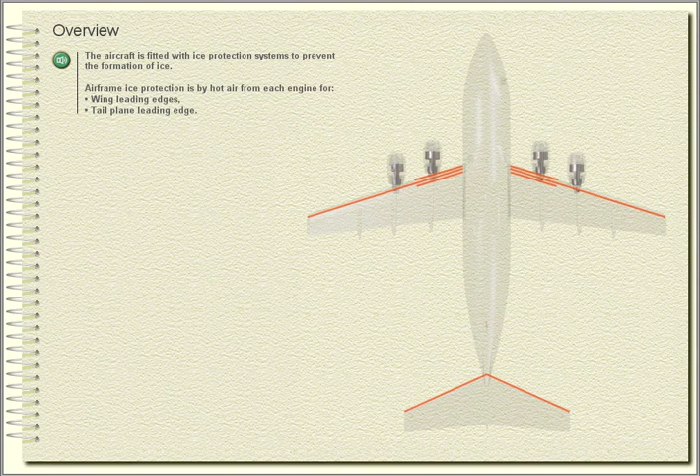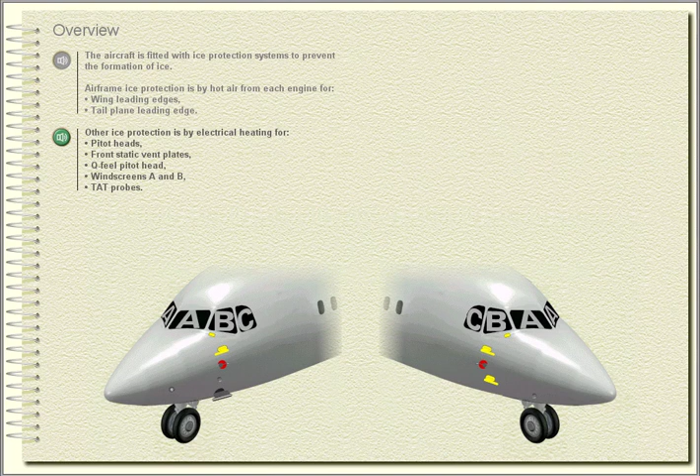Other ice protection is by electrical heating for pitot heads, front static vent plates, Q-Feel pitot head, windscreens A and B, and TAT probes. Each A windscreen is provided with a 2-speed wiper and a manually operated screen wash. An ice detector is fitted to warn the crew of ice accretion.

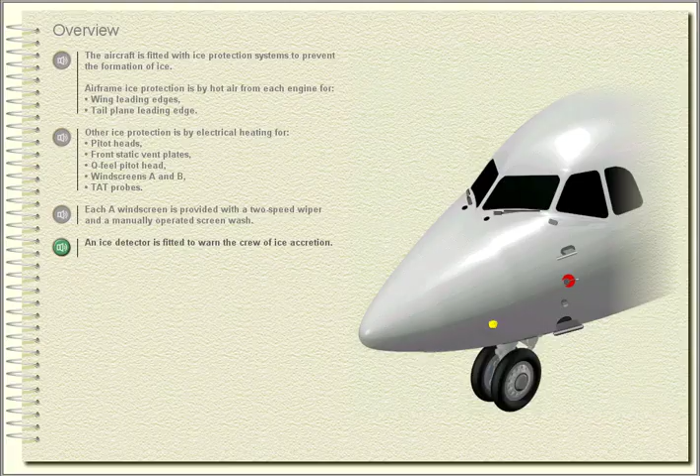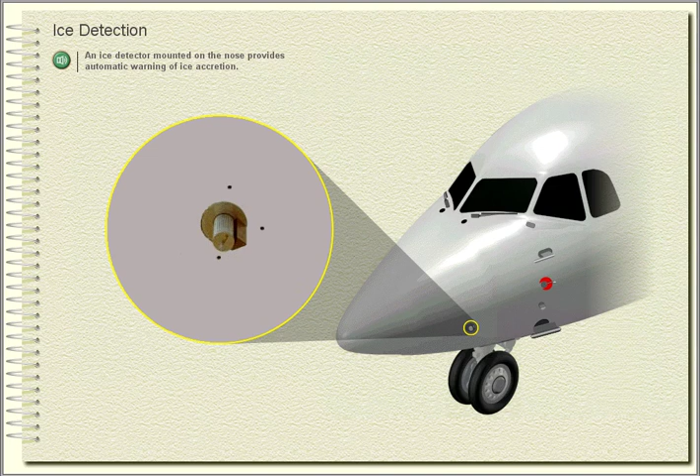Ice detection. An ice detector mounted on the nose provides automatic warning of ice accretion. The ice detector is controlled by the ICE DETECT switch on the ice protection panel. The switch is normally on and is covered to prevent it being selected off accidentally.

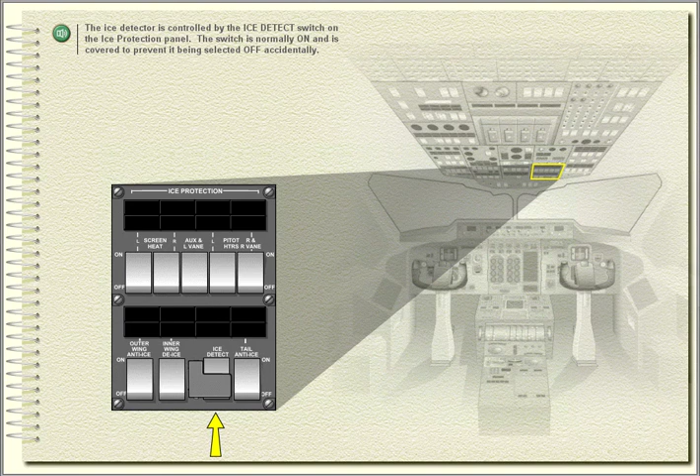The ice detector comprises an AC motor driving a serrated rotor next to a fixed knife-edge cutter. In icing conditions, the cutter shaves the ice which forms on the serrated rotor.

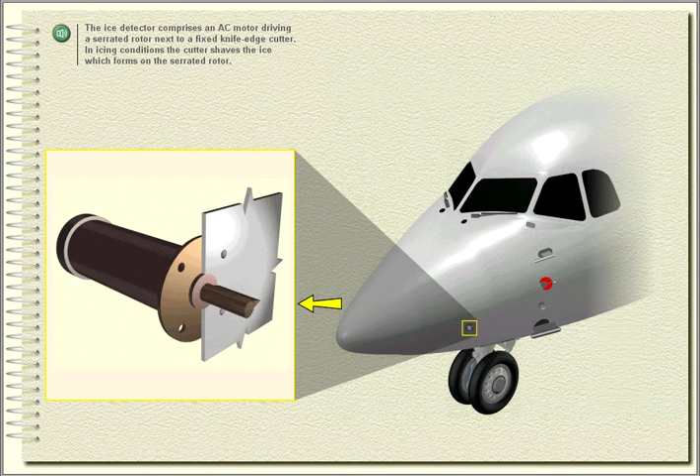This action produces a torque reaction in the motor, which illuminates ice detected on the central warning panel. The annunciator will remain lit for 60 seconds or until the aircraft is out of icing conditions.

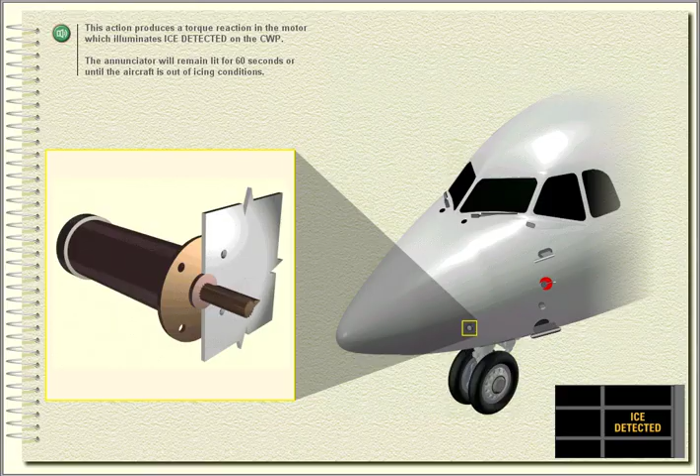Wing ice protection. Wing ice protection is provided by two separate systems: outer wing anti-icing and inner wing de-icing. The complete wing leading edge is anti-iced by hot air, normally supplied from the outer engines 1 and 4.

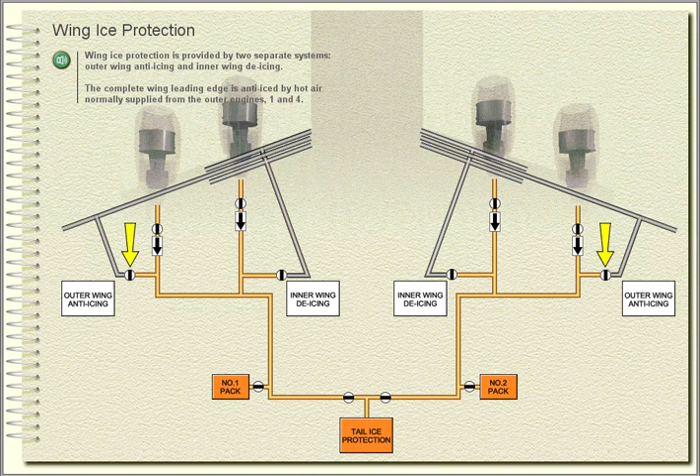Additional ice protection is provided for the inner section of the wing only, which is de-iced by hot air, normally supplied from the inner engines 2 and 3.

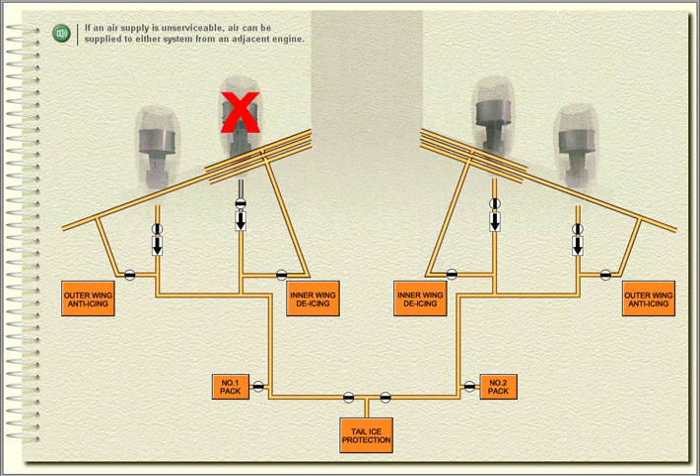If an air supply is unserviceable, air can be supplied to either system from an adjacent engine. Exhaust air is ducted overboard through under-wing vents or at the wingtips across the aileron horn.

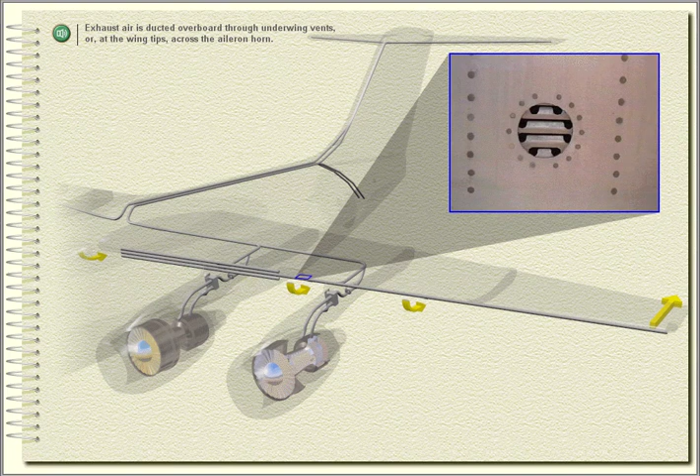Outer wing anti-icing is used whenever ice forms on the airframe to keep the leading edge clear of ice. Inner wing de-icing is used during holding and approach in icing conditions to remove built-up ice from the inner section of the wing.

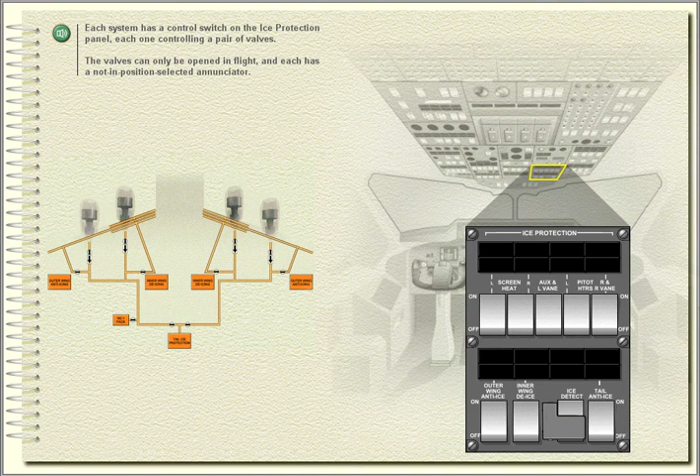Each system has a control switch on the ice protection panel, each one controlling a pair of valves. The valves can only be opened in flight, and each has a not in position selected annunciator. Operation of either outer wing anti-icing or inner wing de-icing is confirmed by wing tail anti-ice on.

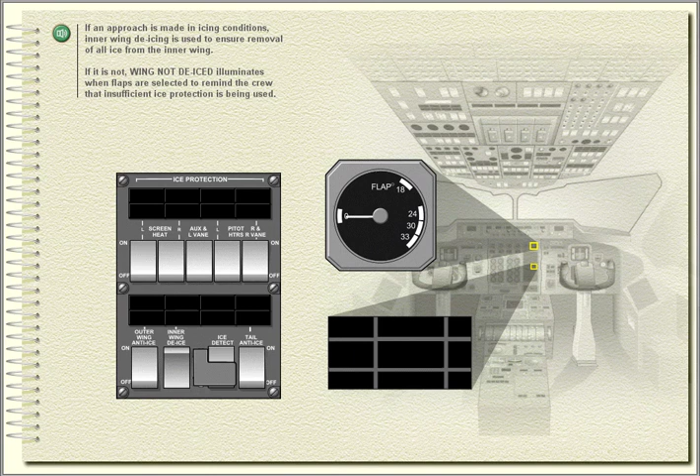If an approach is made in icing conditions, inner wing de-icing is used to ensure removal of all ice from the inner wing. If it is not, wing not de-iced illuminates when flaps are selected to remind the crew that insufficient ice protection is being used.

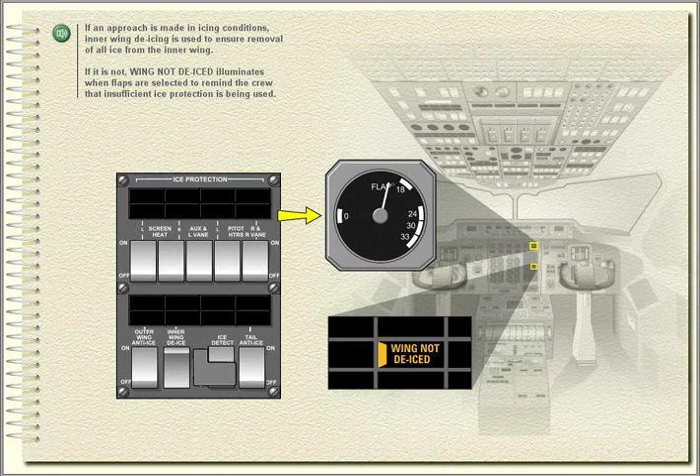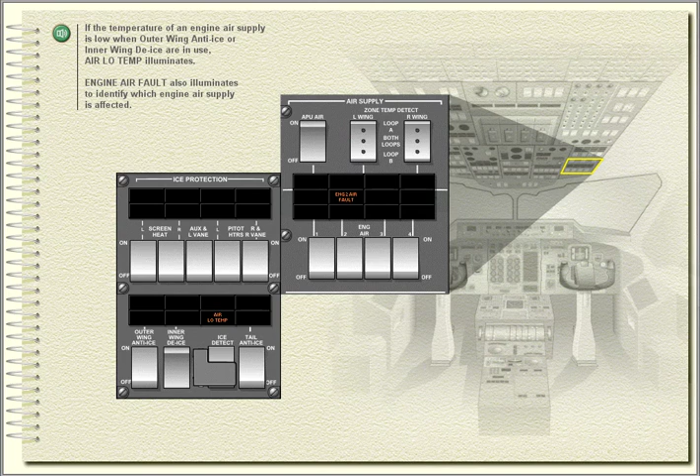If the temperature of an engine air supply is low when outer wing anti-ice or inner wing de-ice are in use, air low temp illuminates. Engine air fault also illuminates to identify which engine air supply is affected. Engine air fault will not illuminate if the engine air valve is selected off.

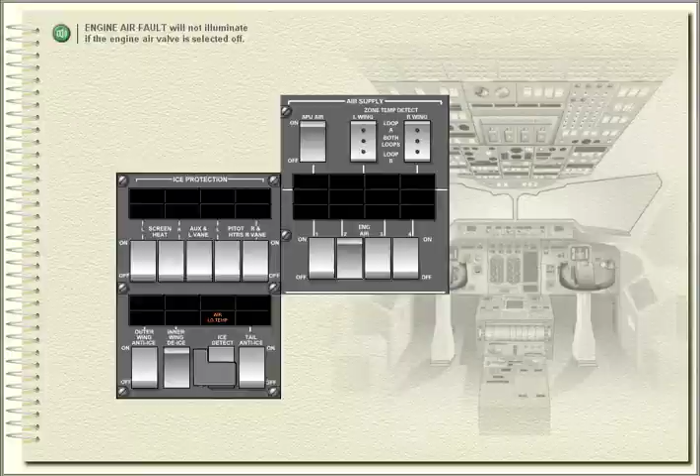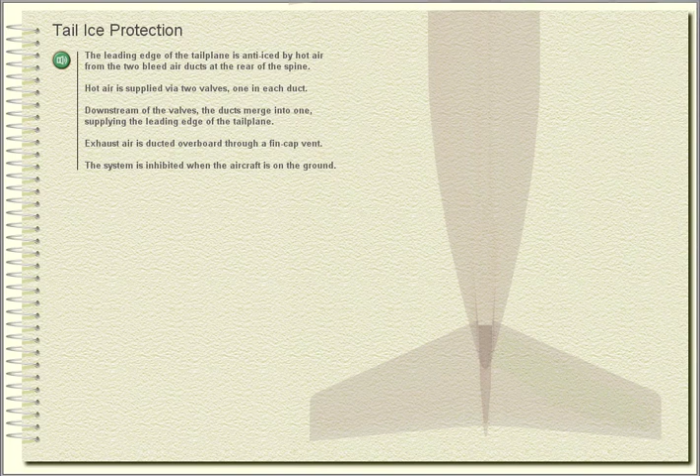Tail ice protection. The leading edge of the tailplane is anti-iced by hot air from the two bleed air ducts at the rear of the spine. Hot air is supplied via two valves, one in each duct.

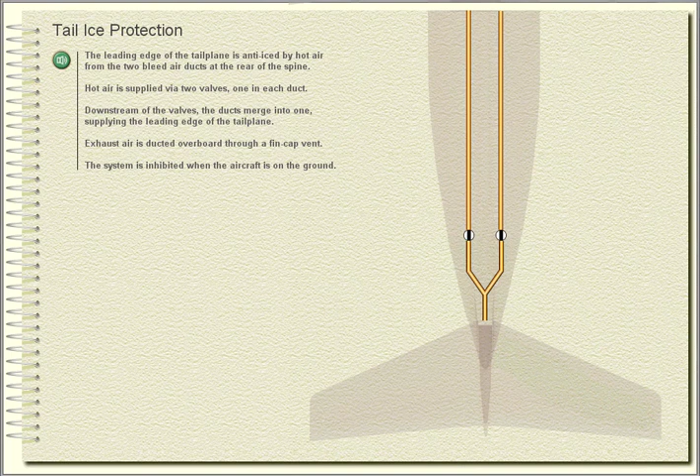Downstream of the valves, the ducts merge into one, supplying the leading edge of the tailplane. Exhaust air is ducted overboard through a fin cap vent. The system is inhibited when the aircraft is on the ground.

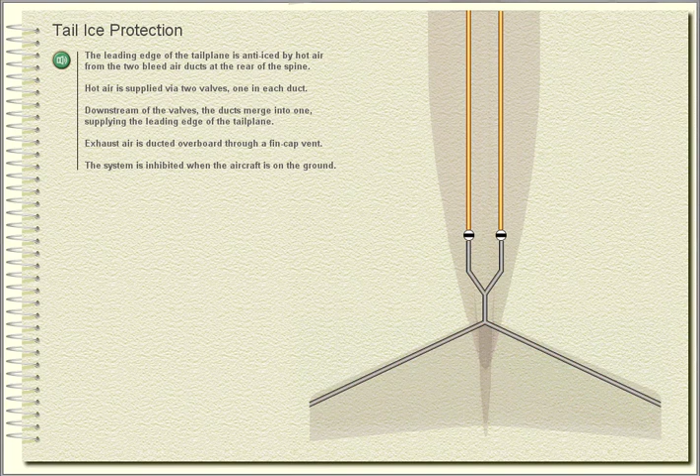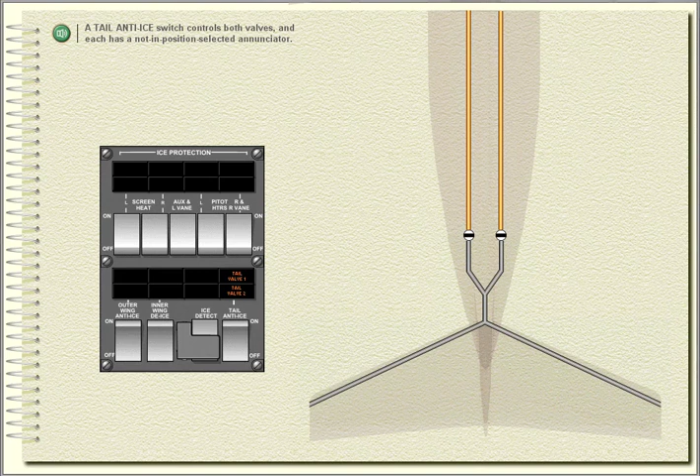A tail anti-ice switch controls both valves, and each has a not in position selected annunciator. Operation of tail anti-icing is confirmed by wing tail anti-ice on. This annunciator confirms the operation of any of the three airframe ice protection systems.

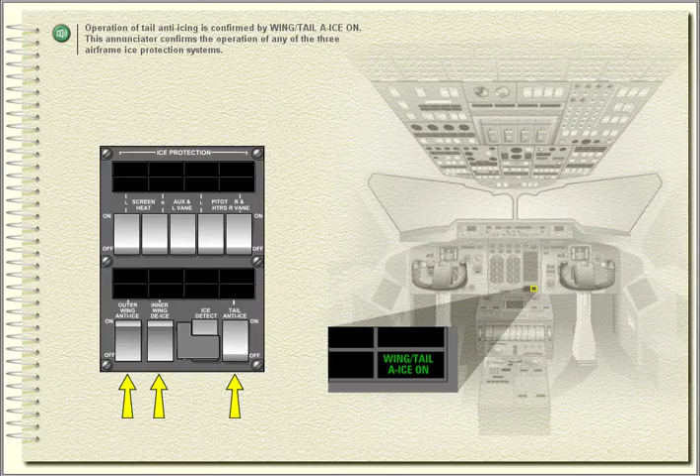Pitot and static heaters. The pitot heads, static plates, TAT probes and airflow sensor vanes are fitted with electrically heated elements to prevent ice formation.

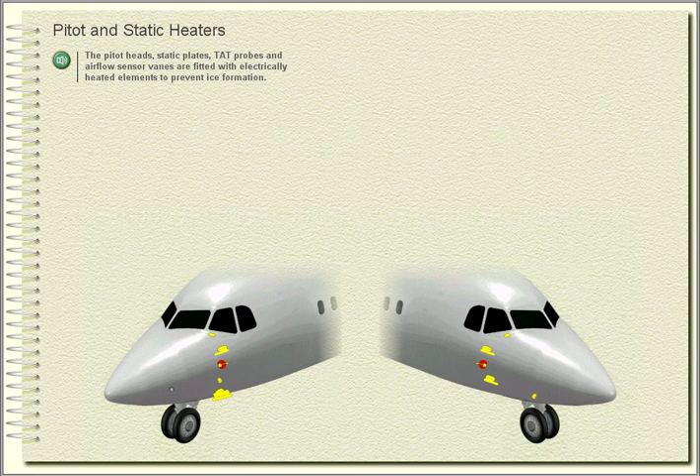There are three pitot heads mounted on the forward fuselage. The captain's on the left-hand side, the first officer's on the right-hand side. An auxiliary pitot head is fitted on the right-hand side just below the first officer's. A Q-pot pitot static head supplies the control feel system and is mounted on the underside of the forward fuselage.

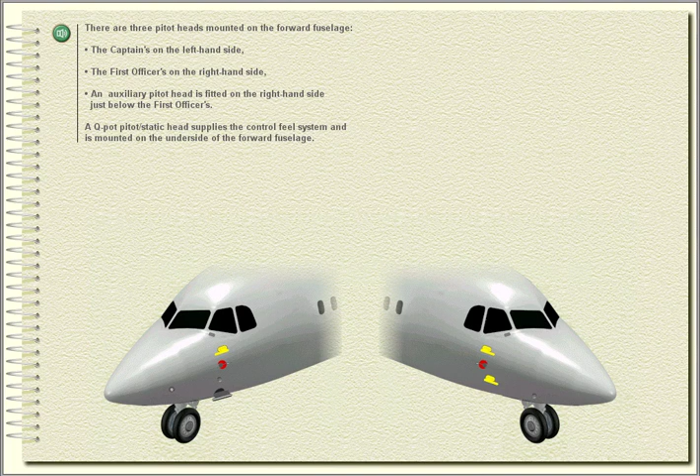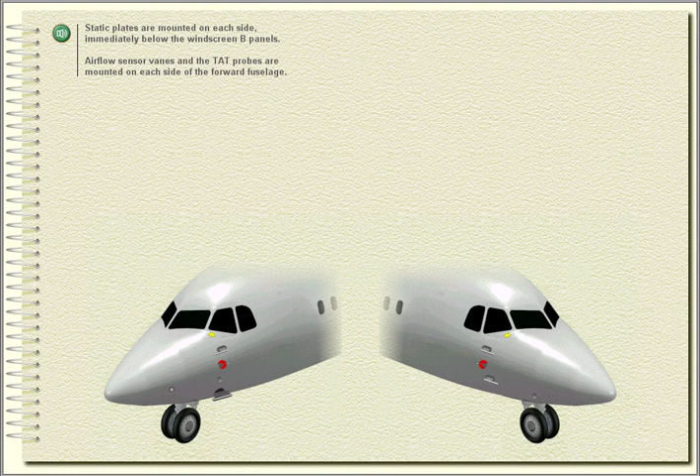Static plates are mounted on each side, immediately below the windscreen B panels. Airflow sensor vanes and the TAT probes are mounted on each side of the forward fuselage.

Three switches, labelled left pitot heaters, right pitot heaters and right vane, and auxiliary and left vane, control power to the pitot heaters and airflow sensor vane heaters.

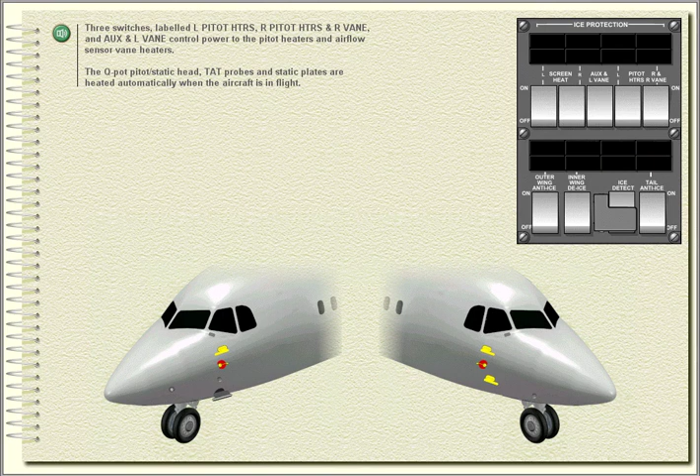The Q-pot pitot static head, TAT probes and static plates are heated automatically when the aircraft is in flight. Failure of any pitot heater, airflow sensor vane heater or the Q-pot pitot static heater is indicated on the ice protection panel. There is no failure indication for a static plate or TAT probe heater.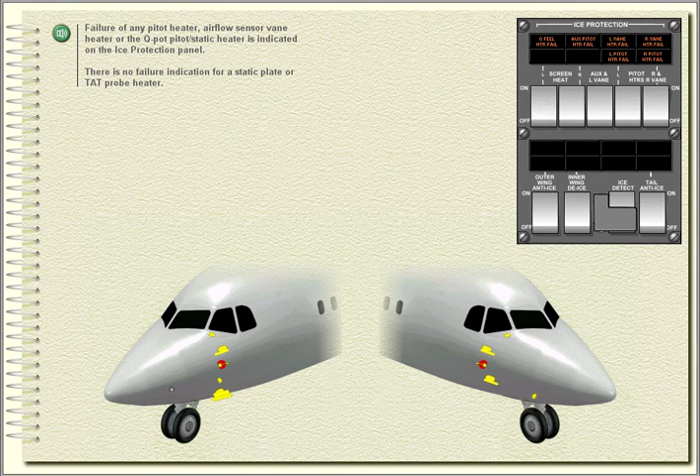Windscreen heating. The A and B windscreen panels are electrically heated to prevent the formation of ice and mist on them, and to improve their resistance to bird strike.

Heating for the left and right A and B panels is controlled from the left and right screen heat switches on the overhead panel.

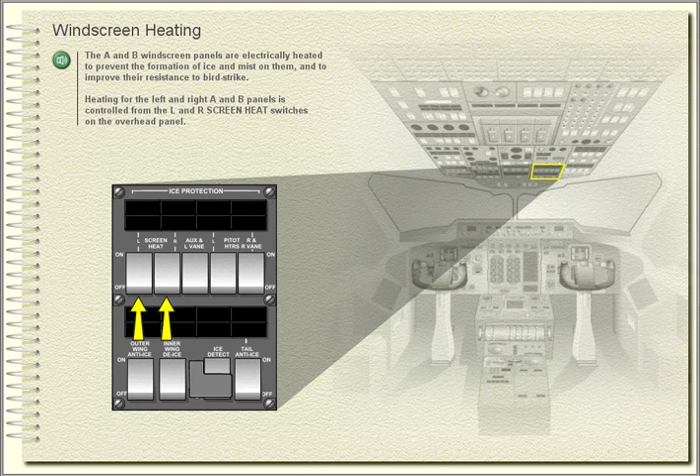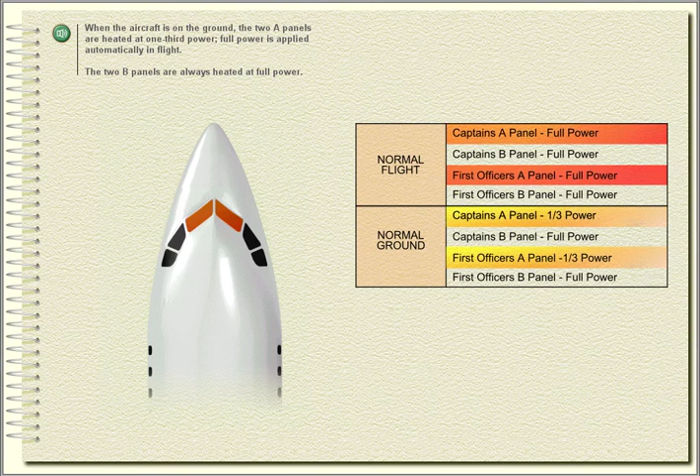When the aircraft is on the ground, the two A panels are heated at 1/3 power. Full power is applied automatically in flight. The two B panels are always heated at full power.

When electrical power is reduced to the essential level, the captain's A panel is heated at 1/3 power. The captain's B panel and both of the first officer's panels are not heated.

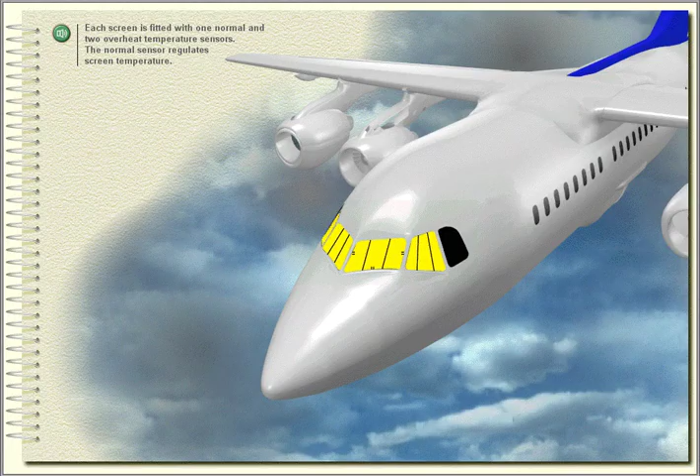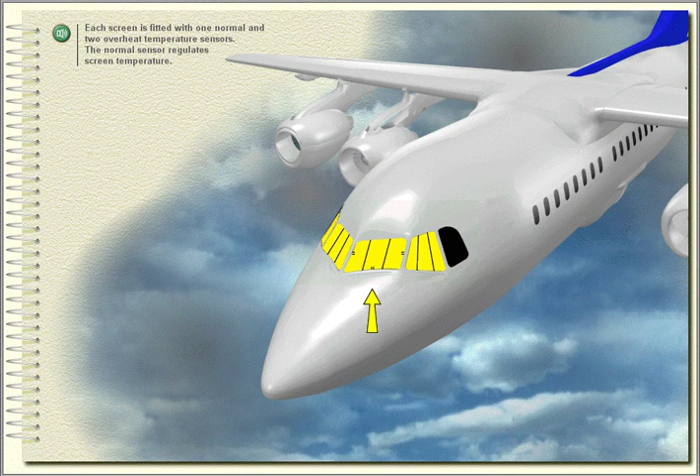Each screen is fitted with one normal and two overheat temperature sensors. The normal sensor regulates screen temperature. If the normal sensor fails, screen temperature rises. When either overheat sensor operates, power to the windscreen is disconnected and left or right screen high temp illuminates.

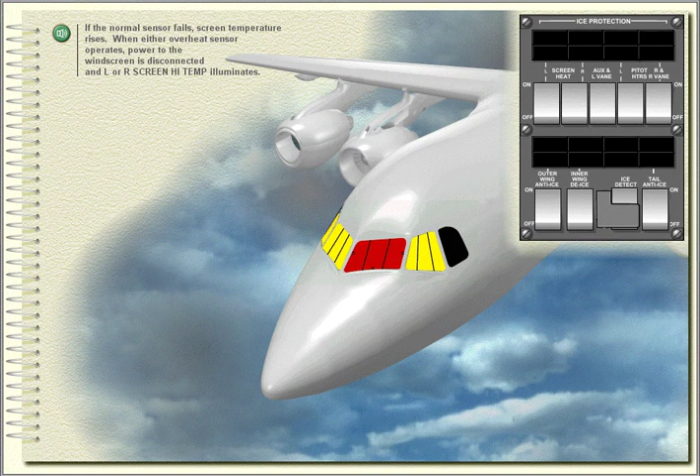When the panel cools down, the heating supplies are restored to the windscreen panel and its temperature is regulated at a higher level than normal. The fault warnings remain illuminated until reset by cycling the appropriate screen heat switch.

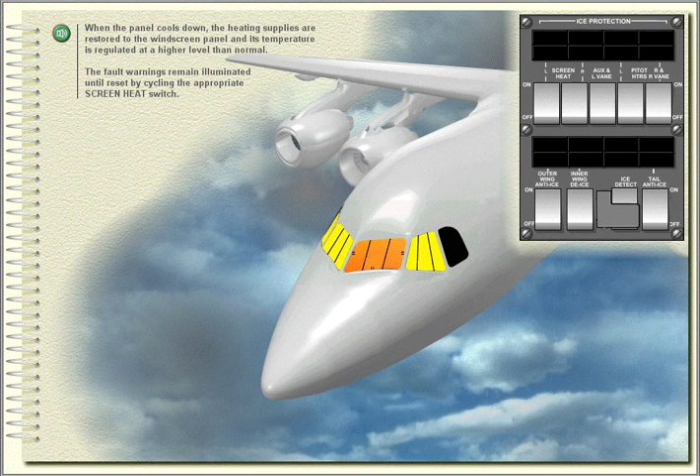If screen heat is not selected on at any time, screen heat selected off illuminates on the central status panel.

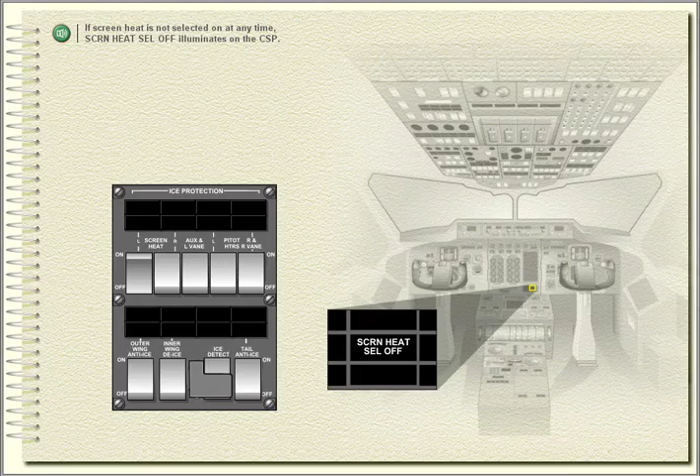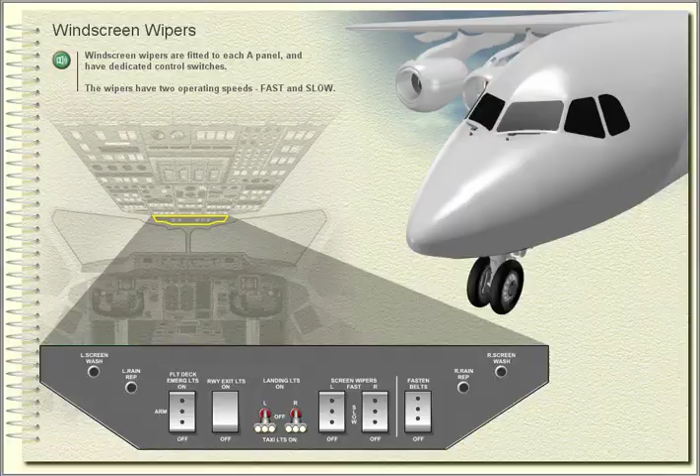Windscreen wash. The external surfaces of the two A windscreen panels can be cleaned using the windscreen wash system. Pressing the left or right screen wash buttons on the overhead panel will direct fluid onto the screens. The fluid is stored in a reservoir in the electrical equipment bay.

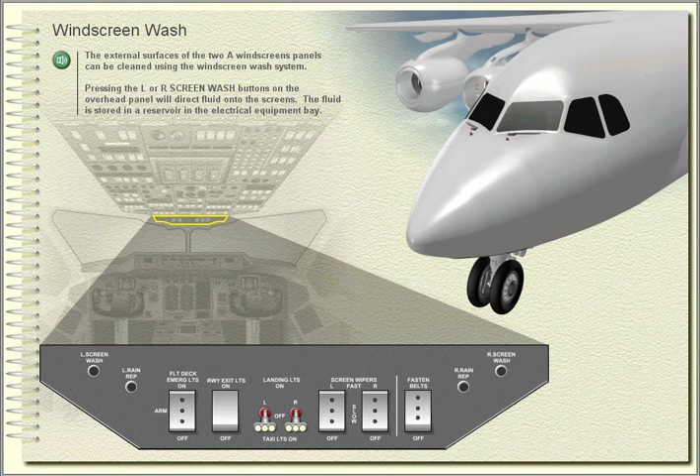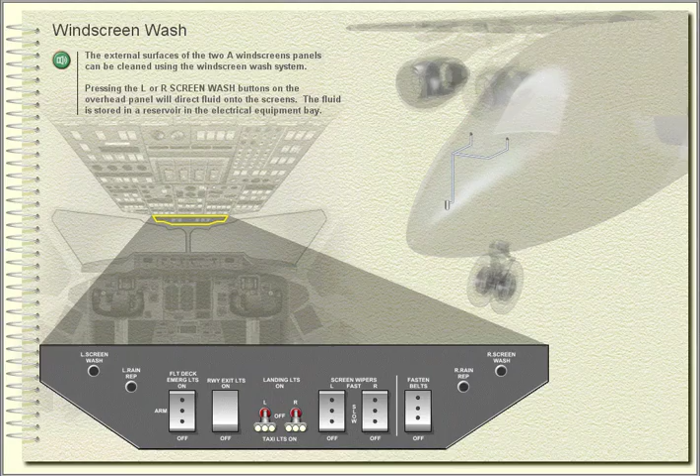Rain repellent. A rain repellent system is fitted to the aircraft, but because of the harmful effects of the fluid, the system is normally disabled.

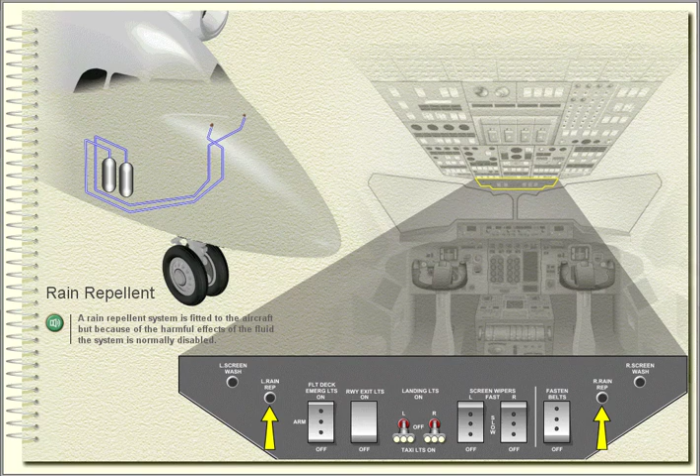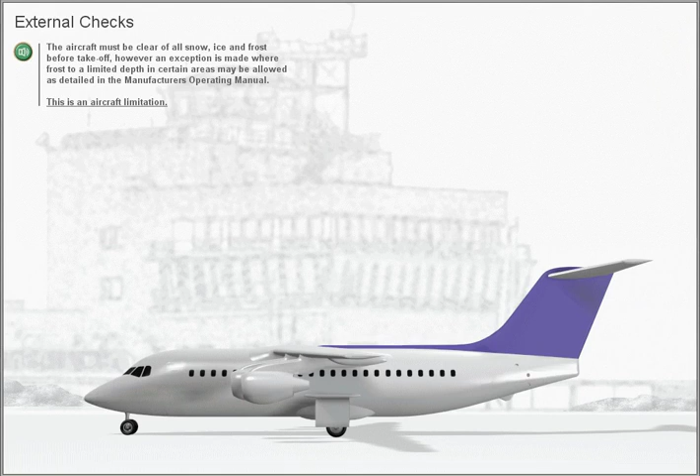External checks. The aircraft must be clear of all snow, ice and frost before takeoff. However, an exception is made where frost to a limited depth in certain areas may be allowed, as detailed in the manufacturer's operating manual. This is an aircraft limitation.

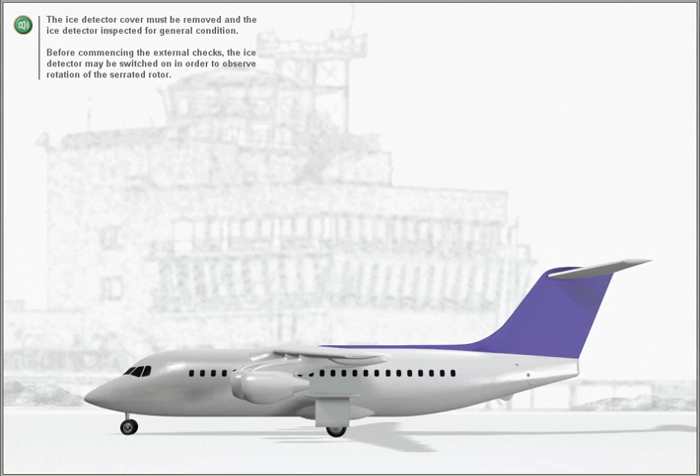The ice detector cover must be removed and the ice detector inspected for general condition. Before commencing the external checks, the ice detector may be switched on in order to observe rotation of the serrated rotor.

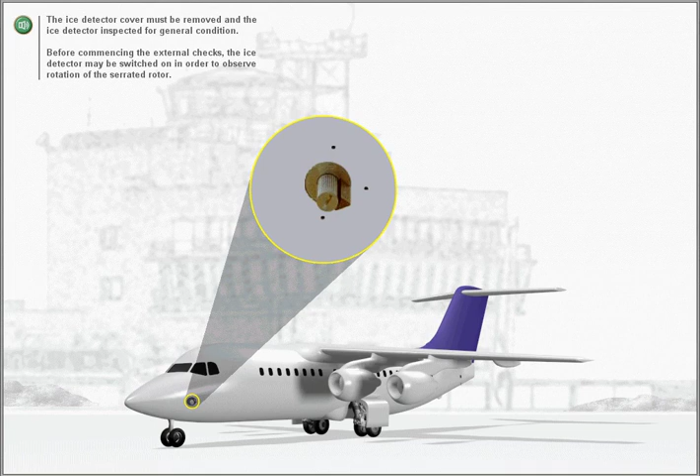The condition of the windscreen wipers and screen wash rain repellent heads must be checked.

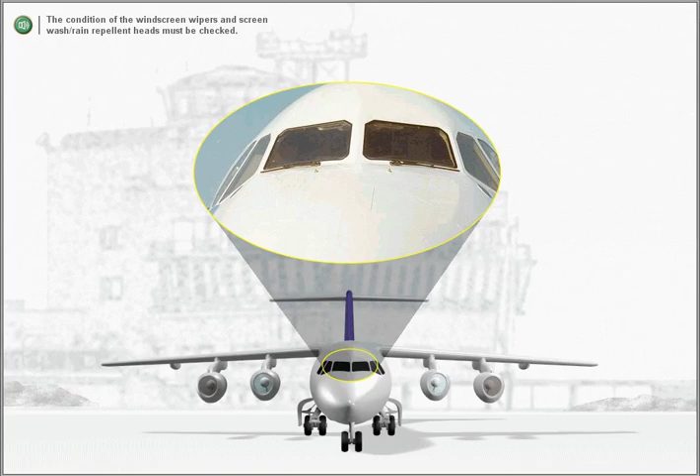Pre-flight. After AC power has been applied to the busbars, the screen heat and pitot and vane heaters must be checked off. This is confirmed by the 5-heater fail captions. The Q-Feel heater fail caption is not lit because power is not supplied to the heater on the ground.

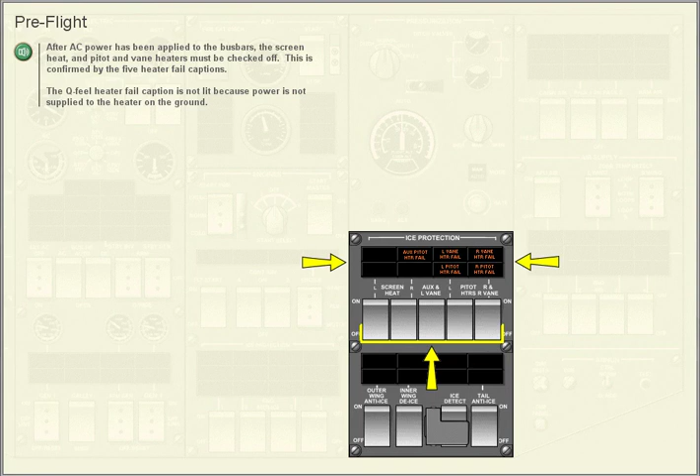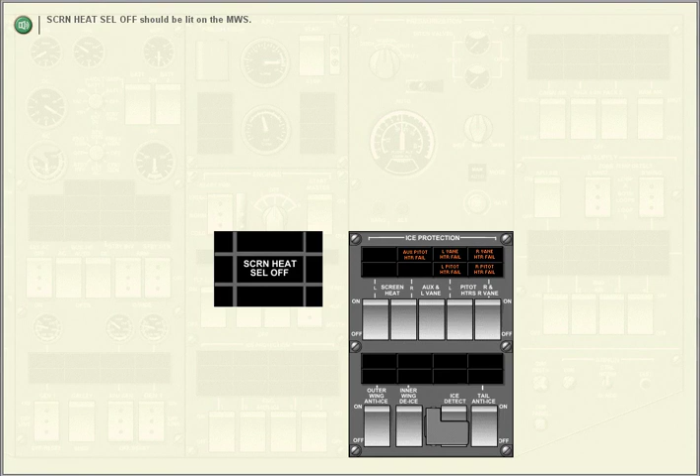Screen heat selected off should be lit on the master warning system. Outer wing anti-ice, inner wing de-ice, tail anti-ice and ice detect should all be checked off. The associated wing and tail ice protection valve indications should all be checked out.

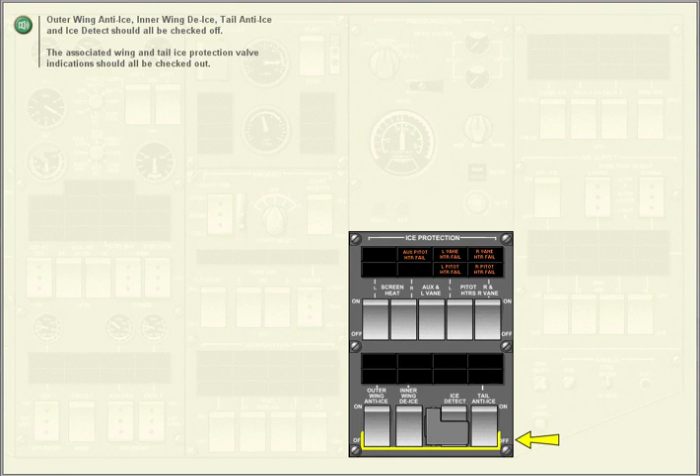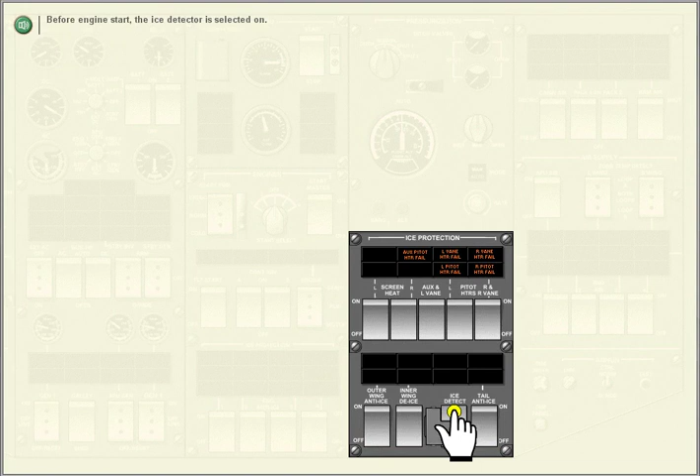Before engine start, the ice detector is selected on. After engine start, all the heater switches are selected on. The screen heat selected off and all the captions on the ice protection panel should now extinguish.

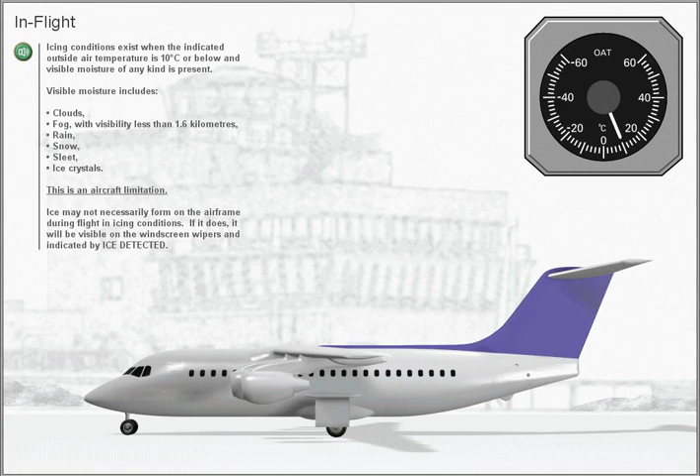In flight. Icing conditions exist when the indicated outside air temperature is 10 degrees Celsius or below, and visible moisture of any kind is present. Visible moisture includes clouds, fog with visibility less than 1.6 kilometers, rain, snow, sleet, ice crystals. This is an aircraft limitation.

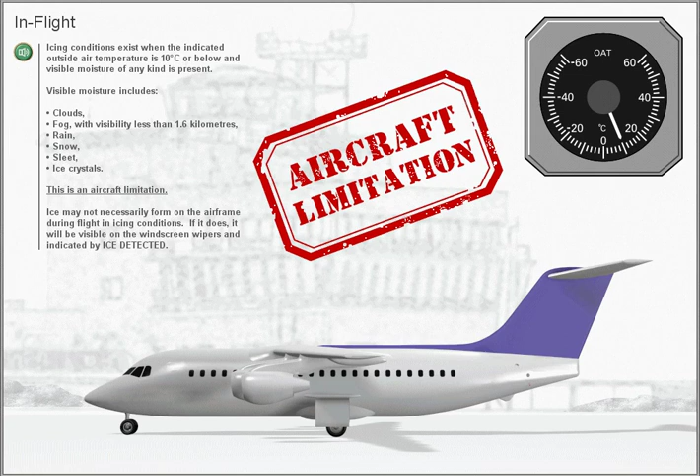Ice may not necessarily form on the airframe during flight in icing conditions. If it does, it will be visible on the windscreen wipers and indicated by ice detected. Tail anti-ice and outer wing anti-ice must be selected on whenever the ice detected warning illuminates or ice is visible on the airframe.

When ice detected extinguishes, inner wing de-ice should be selected on for 1 minute before all airframe anti-ice and de-ice is selected off.

If any of the airframe de-ice or anti-ice switches are selected on, with a takeoff setting selected on the thrust rating panel, the N1 set on the primary engine display will flash to indicate an illegal bleed setting.

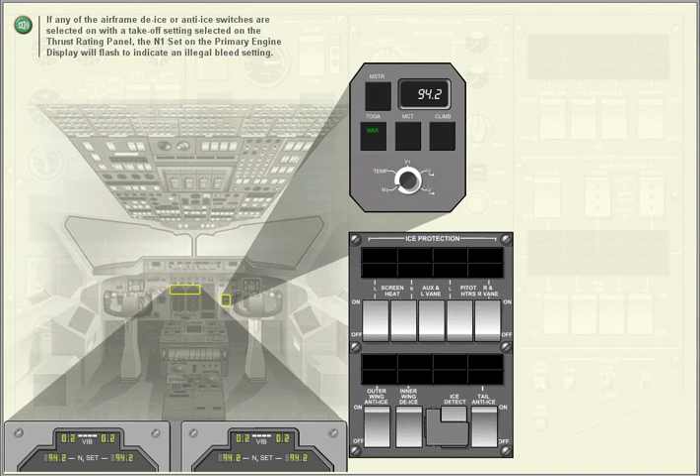If ice forms on the airframe during takeoff, tail anti-ice and outer wing anti-ice may be selected on after the TRP is selected to a climb rating or maximum continuous thrust, MCT.

If the flaps are still extended, wing not de-iced will illuminate until they are retracted.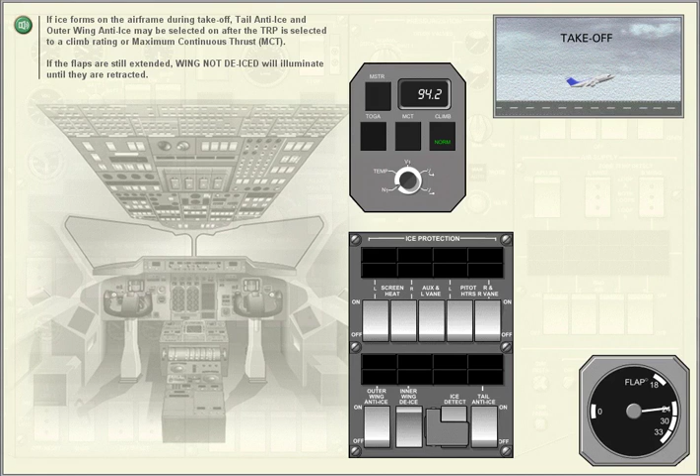During the descent, airframe anti-icing must be selected on whenever icing conditions are encountered, even when ice has not formed on the airframe.

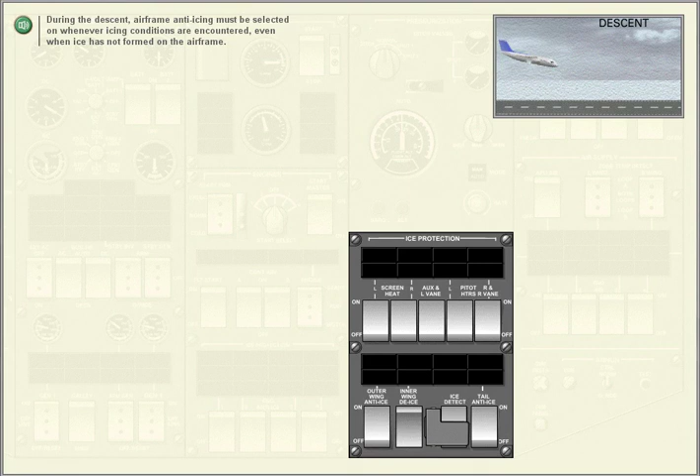During prolonged holding, either in icing conditions or when ice forms on the airframe, tail anti-ice and outer wing anti-ice must be selected on. Inner wing de-ice must be selected on for 1 minute at 8 to 10 minute intervals.

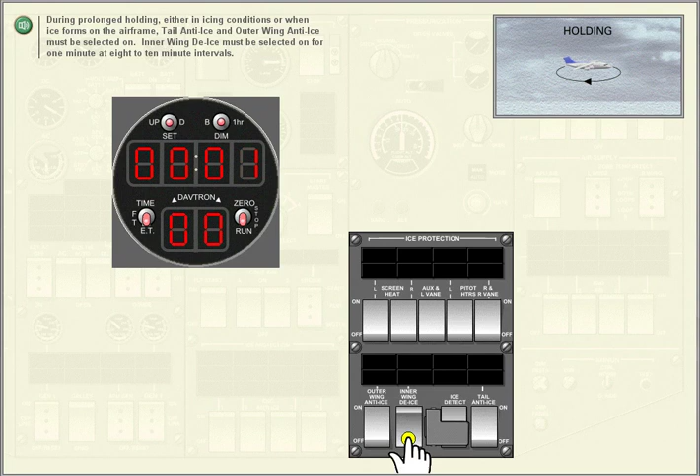If ice forms on the airframe during holding, flaps must not be selected and 7 knots must be added to all speeds. At 200 knots and before selecting flaps, inner wing de-ice must be switched on to prevent wing not de-iced from illuminating unnecessarily.

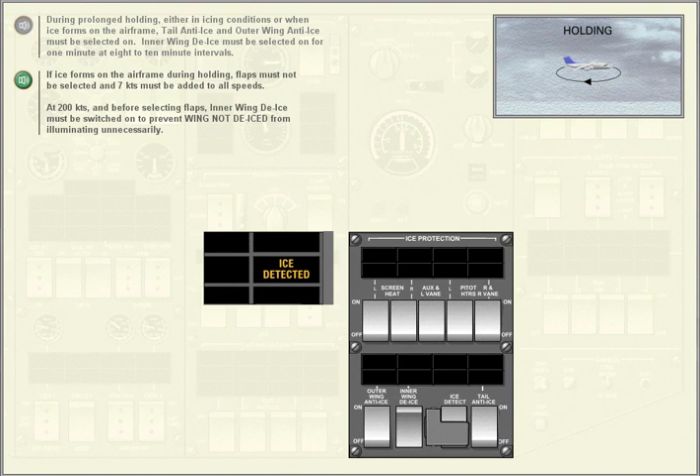Between 500 feet and 200 feet on approach, all airframe anti-ice and de-ice must be selected off. APU air is selected on and all engine air selected off.

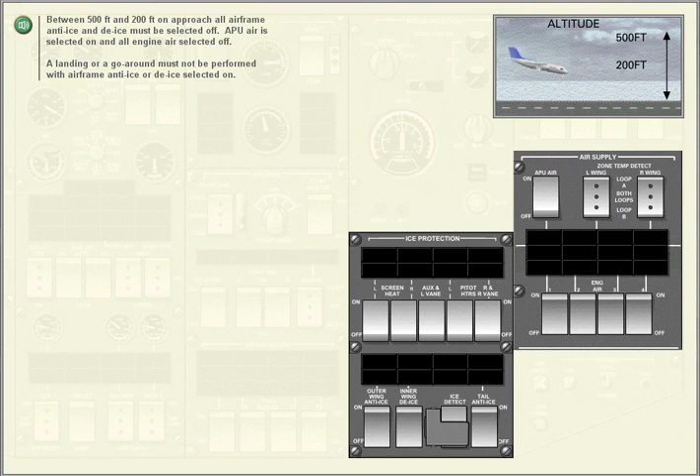A landing or a go-around must not be performed with airframe anti-ice or de-ice selected on. Whenever airframe anti-ice or de-ice is selected on or off, the associated valve nips indications must be monitored for correct operation.

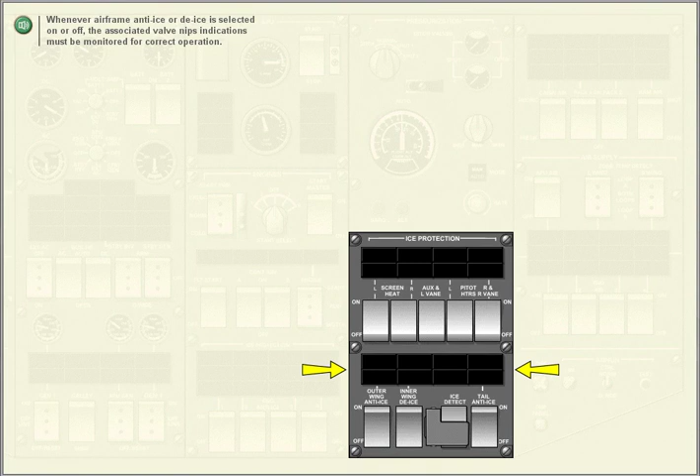After engine shutdown, all heaters on the ice protection panel and the ice detector may be selected off.